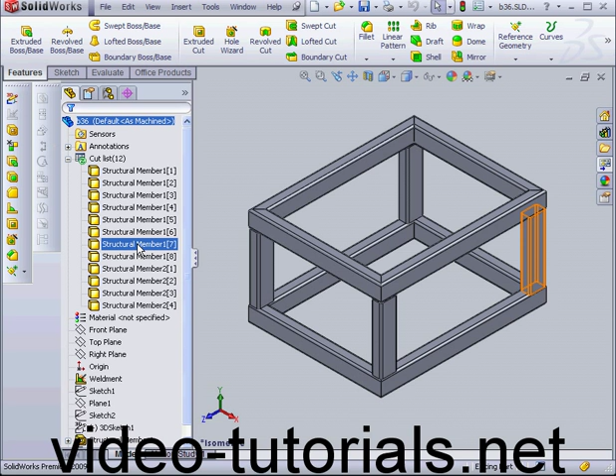Now, creating a Weldment Cut List table is pretty similar to creating the bill of materials for an assembly. First, we need to create a cut list item. I'm going to right-click on our cut list and select Update. Now, our 12 structural members have been combined into 4 cut list items. Now, let's create a drawing document.

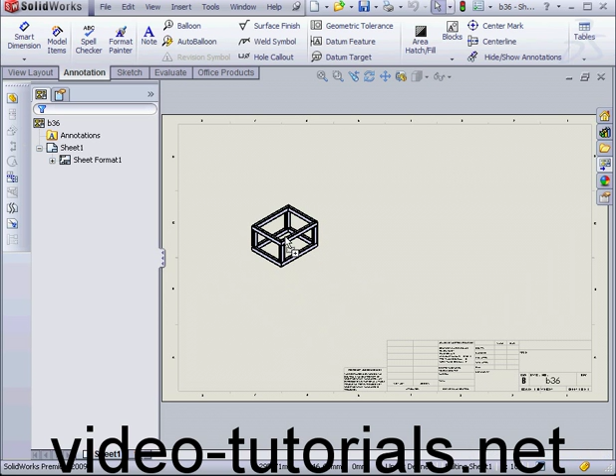Make drawing from part assembly. OK. B landscape. OK. And from our view palette, let's drag in the isometric view. OK. Let's right-click. Select Properties. And let's change our scale from 1 to 10 to 1 to 4. OK.

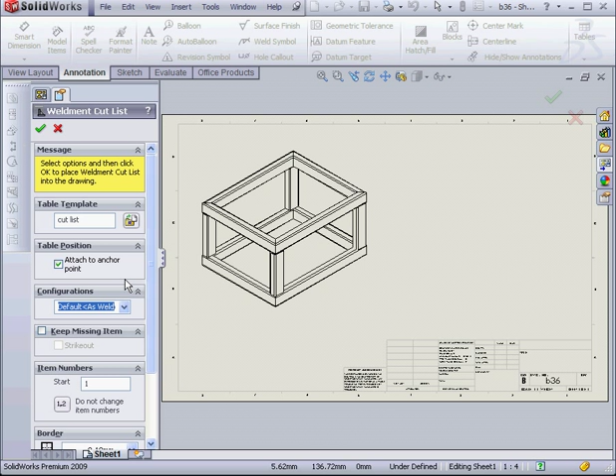Next, let's go to the Insert command on the main menu. Select Tables, Weldment Cut List. At this point, I select my view, attach it to the anchor point, and click OK. Next, we need to change the anchor position. Right-click on the Weldment Cut List, select Set Anchor, and we're going to set it at this corner here.

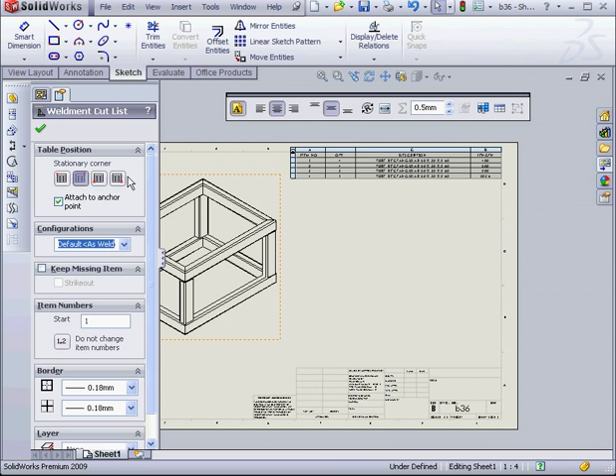Let's change the stationary corner. Click OK. We've got 4 columns in our table: item number, quantity, length, and description. Let's add a couple more columns for first and second angles. Right-click, Insert Column Right. Again, right-click, Insert Column Right.

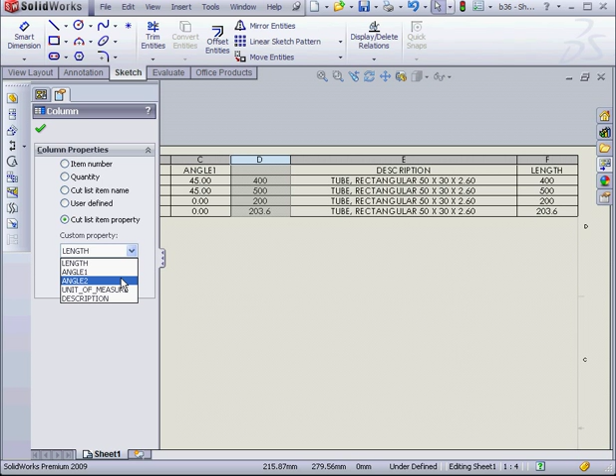Now I'm going to select this column. Select a custom property, first angle, and angle 2 here. And let's click OK. Next, in our cut list, we've got 4 different items. Items 3 and 4 are identical. We've obviously got a problem here. One structural member is 3.6 millimeters longer.

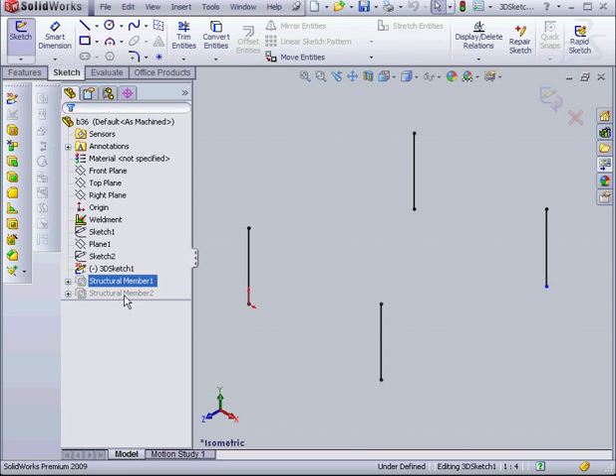Let's go to our part document to see what's going on. Here our problem is the structural member. The most likely reason is a problem with the sketch. Let's right-click and edit the sketch. Let's make sketches 1 and 2 visible. Here's our problem. Let's grab and merge these points together and exit the sketch. Now we'll zoom to fit.

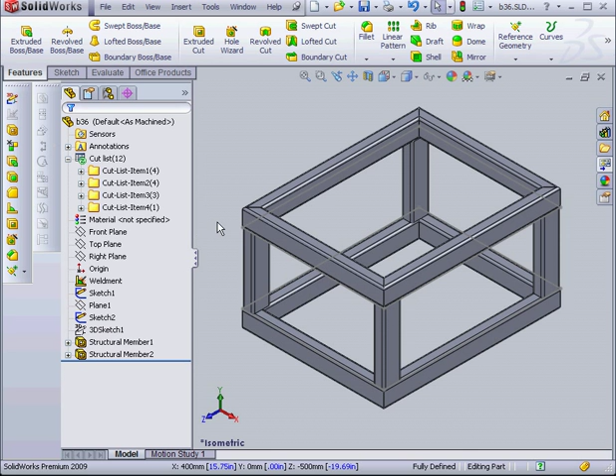This symbol here indicates that the cut list needs to be updated. Let's right-click and choose Update. Now the cut list item 3 contains all 4 identical structural members. Let's go back to our drawing document. We've got 3 items in our table now instead of 4.

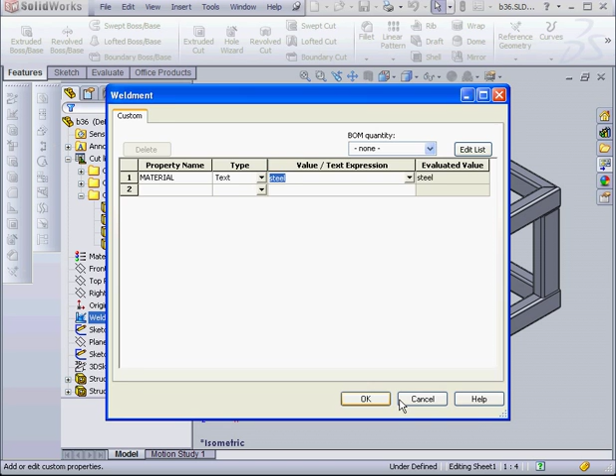Let's go and assign a material to our part. I'm going to assign it at the part level. Let's right-click, select Properties, Property Name, Material. Let's enter a value of steel, and click OK. Now let's assign a different material to cut list item 3. As you see, steel is already propagated here.

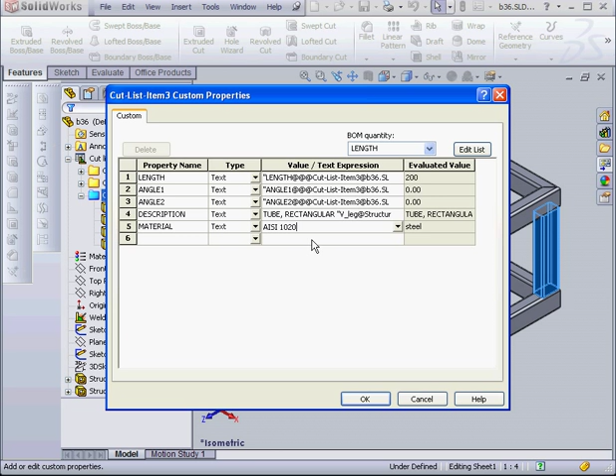I'm going to use AISI 1020 here. By the way, AISI is an acronym that stands for American Iron Steel Institute. And the number 1020, let's click OK here, basically indicates that it's carbon steel. Let's go back to our drawing document.

I want to insert a column to the right of the quantity column. Right-click, Insert, Column Right. Now let's select the column and choose Cut List Item Property from the column properties. We'll select Material. And here you see our AISI 1020 populates item 3. And let's go back to our part.

You can combine items in a cut list manually. Just select the cut list. Oops, let's delete that. Now let's shift select the structural members 5 and 6. OK, right-click, uncheck Automatic. Now right-click and select Create Cut List Item.

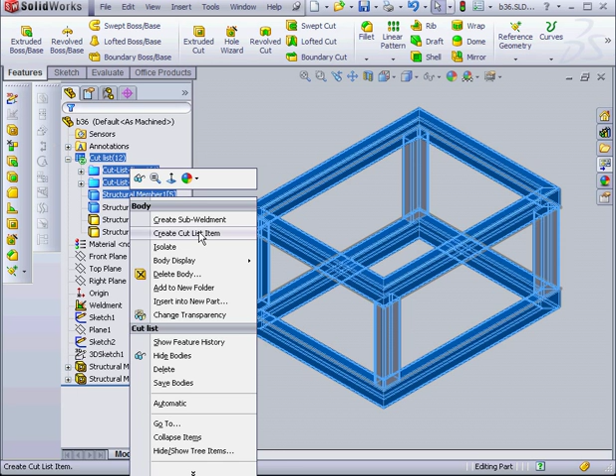Now let's shift select 6 and 7. Oops, I can't quite get them. OK, there we go. With 6 and 7 selected, we right-click and Create Cut List Item. And lastly, number 8, right-click, Create Cut List Item. The symbol on the cut list indicates that it is current and doesn't need to be updated. Let's go back to our drawing document. As you see, we have 5 items here now.

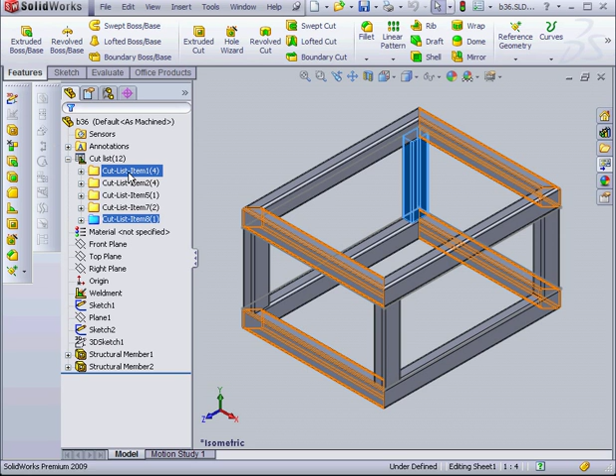Let's go back to our part. We're going to shift select, press delete. Now right-click and choose Automatic. Once again, the structural members combine into the cut list items. Let's go back to our drawing document to see how this is reflected in our table. Of course, the table reflects our changes as well. And this concludes our tutorial about the Weldment Cut List.